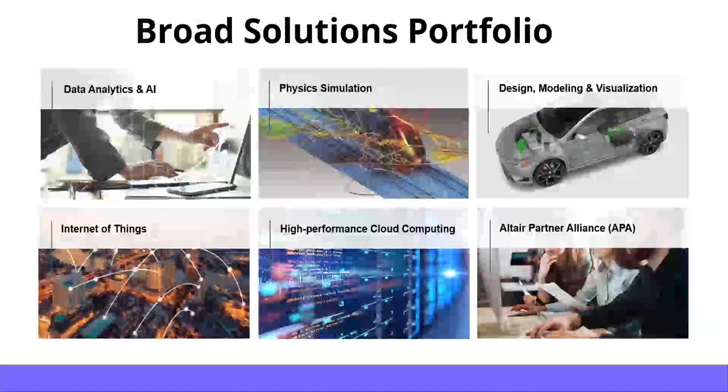The other thing, just to point out, Altair's tools have been used by various customers. And I think the really cool thing you're going to see as we work through today's webinar on implicit modeling is that the applications run the gamut from product design through aerospace and automotive, through government and defense. There's a lot of customers using DfAM and additive manufacturing, and being able to take advantage of implicit modeling is super, super useful.

Then we're actually going to spend some time within Inspire 2023, focusing in on implicit modeling. So we'll jump through the different types of lattices, specifically looking at field-driven design, and even jump into a little bit of Python scripting.

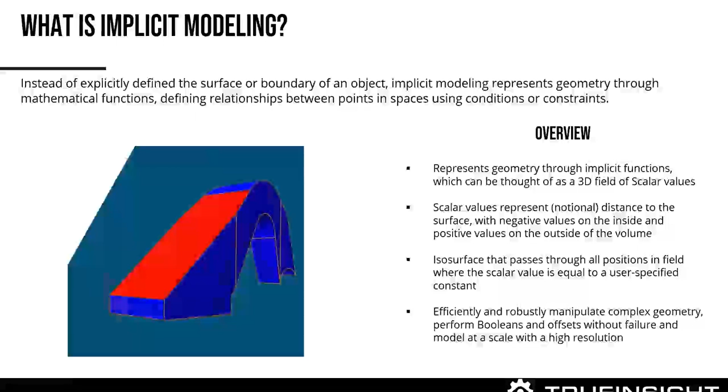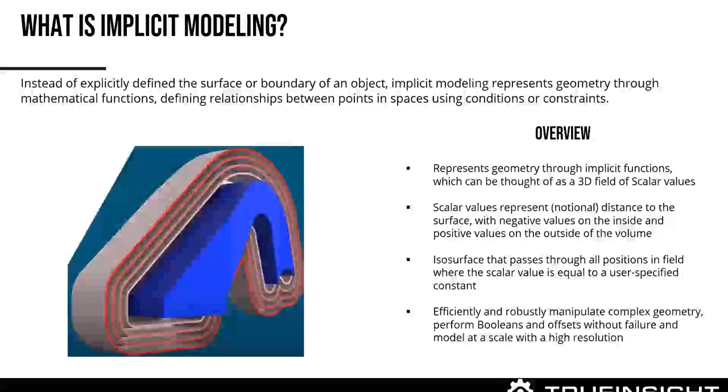So as a result of being able to model things through mathematical functions, it's much more computationally efficient than traditional explicit modeling. So it really allows you to work on complex geometry. The advantage of additive manufacturing is we can now easily manufacture lattice structures, and lattice structures are super, super handy. We see them in nature, in bones and biology, and being able to utilize that technology and model it is very important. So why do we want to use implicit modeling?

So like I said, with implicit modeling, you're modeling one single isosurface, which eliminates the need to create NURBS surfaces. A lot of you probably have done some surface stitching. I did it in one of my previous jobs. It can be very painful going through surface modeling and having to stitch things. Sometimes it works. Other times it can be very exhaustive, both computationally, but also frustrating.

And because in implicit modeling you're modeling a single isosurface, it automatically generates those interfaces, which is very nice. As a result of this, you can model really complex topologies. We'll actually take a look at some with the different types of lattices and complicated structures we can create. Trying to do this in traditional explicit modeling, like traditional CAD, can be very complicated.

So if you look at the images on the right here, it's an example of implicit versus explicit. You see those fans and a heat sink with some lattice work in it. If you're trying to model that in traditional CAD, since it's a 64 by 64 by 64 lattice, that means there's about 260,000 unit cells.

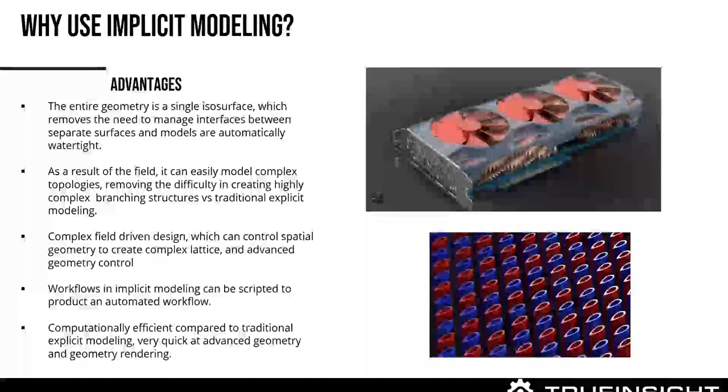The final thing about it is it's really set up for automated workflows, really easy to script if you want to. With the Inspire interface, you can do everything within the GUI, but we do enable Python scripting, so that makes it very nice. So with that being said, let's jump into this.

Okay, so here's an example of traditional lattice design in traditional CAD. So this would be explicit modeling, like I mentioned, some traditional tools out there, B-rep geometry. How you would approach a lattice is you would generate a unit cell. The process of doing that typically is creating surfaces like you see on the left-hand image right here. You generate them and you form a unit cell in the middle. From that point, you then pattern it in whatever 1, 2, or 3 dimensions.

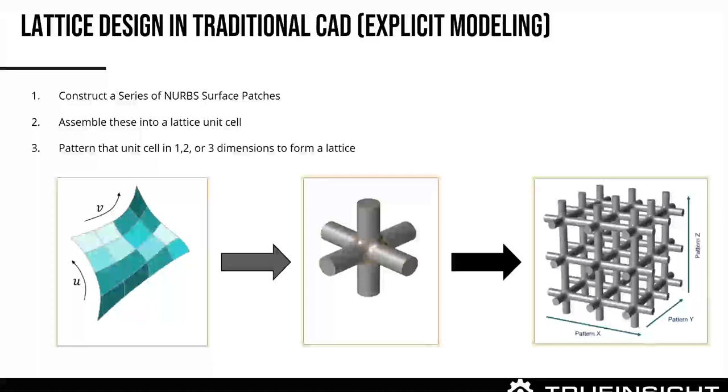This can be done in explicit CAD, but it becomes very computationally exhaustive. You start having very huge files, and it also takes a while to render or move things around within the system. Whereas in implicit modeling, you are modeling everything through a single isosurface. So again, it's able to model all those values very efficiently.

So some of the advantages of using implicit modeling. We talked about being able to model lattices efficiently. That's a huge game changer, and the time savings there. But also in traditional explicit CAD, you are limited in what you can do. Specifically, you have to pattern a unit cell, and that makes it very hard to do translational adjustments. So you see this image on the left-hand side here under translation adjustment.

This would be an application where you see that in the Y direction, the number of cells, those little holes, start to change. So you can actually adjust your lattice work in the Y, Z, or X directions. It's very challenging to do this in explicit modeling. You can do it, but it's not really efficient, and that's something you can do very quickly in implicit modeling.

The other thing would be density adjustment. Density adjustment allows you to make some things thinner and thicker. So thinking about why would you potentially utilize lattices? One would be strength to weight savings. You're reducing the whole mass you need because you can manufacture it with additive. And sometimes you may want to have a thicker lattice for something that's maybe carrying more of the load.

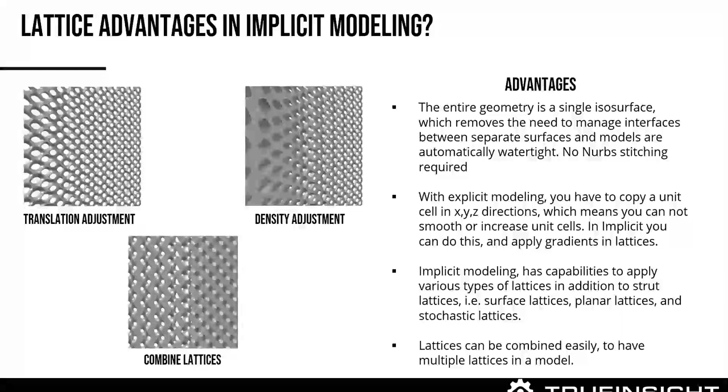The last thing that's really nice about this is you have capabilities to combine multiple different types of lattices. This gives you capabilities for, an example would be like a heat exchanger, trying to have a really nice optimized system with multiple flow paths to move through, and being able to combine lattices is something that's really, really nice within our tool.

So within our tool, the most recent release of Inspire 2023 brought in implicit modeling. Altair has a tool called Sulis, which was an implicit modeler, but most of those features have been migrated over to Inspire, and it really makes the interface very nice and efficient. So what we can do in Inspire now is we can actually create this implicit geometry. And I'm going to step us through a number of examples.

But one of the things I'll say is this is how the menu is laid out. For those of you who are familiar with Inspire, the great thing about this is it's built directly into the Inspire tool, and it has the same GUI and interface you'd expect for our traditional BREP modeling in Inspire. We can now do it for implicit modeling. So you see on the left-hand side here under the create option, you'll see a number of icons.

Starting from the left with the primitives icon, it gives you capabilities of being able to have automated tools, which would be cuboids, cylinders, and spheres. And then specifically, it allows you to automate the actual process of applying those parts. One of the nice things about the primitive tool is say you're importing a whole geometry into the environment, and maybe you want to have a small location with some lattice work. You can apply it accordingly, which is nice.

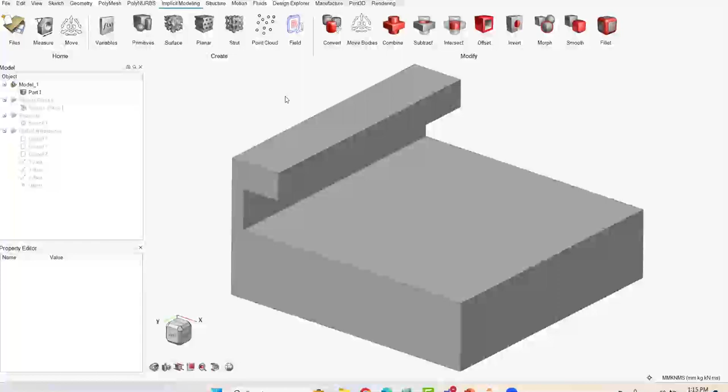But keep in mind, Inspire has always been a traditional BREP tool. So if you wanted to create geometry in Inspire and then jump to implicit modeling, you could do that as well. In this case, we're going to start from a pre-built bracket. And you'll see I actually did generate this in Inspire. That's one of the cool things about the environment. So I created it and extruded it, and now I'm going to jump to the implicit modeling menu.

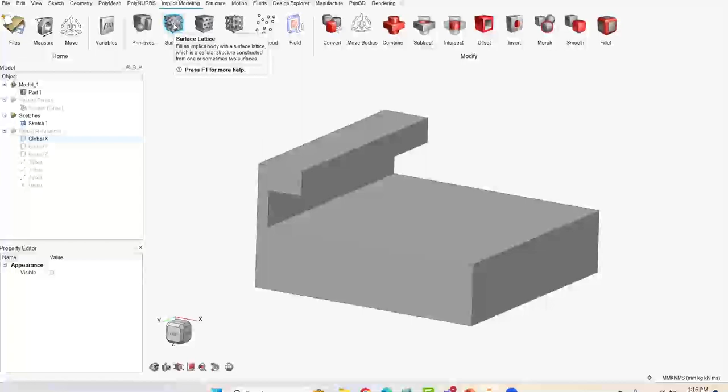So from this case, let's take a look at it. One of the first things that's fairly nice about the environment is it gives capabilities where I can click on an option. And keep in mind, I'm going to turn off the sketch. I am running a webinar right now, and this is all being done just on my GPU. So this makes it fairly easy to adjust things.

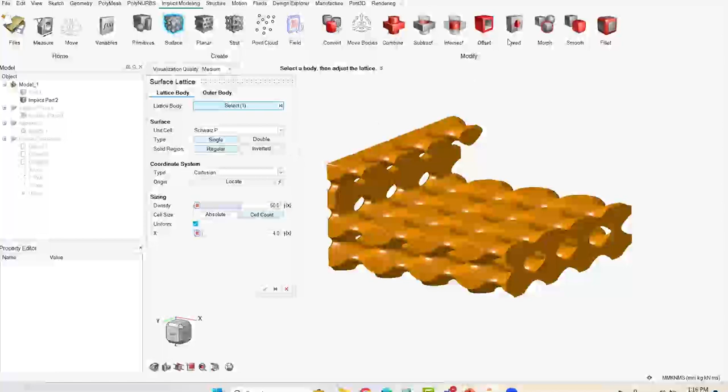Most of you who are running CAD probably have some type of certified GPU card. GPU allows you to work off your graphics card, and it really is a much more efficient way of going through this. If you want to utilize your CPU, you can, but it's optimized for GPU, which allows me to change the unit cells very, very quickly here, which is very nice. So you see a lot of different types of unit cells built into the environment. I'm going to stick with a gyroid lattice. That's the one I'll utilize.

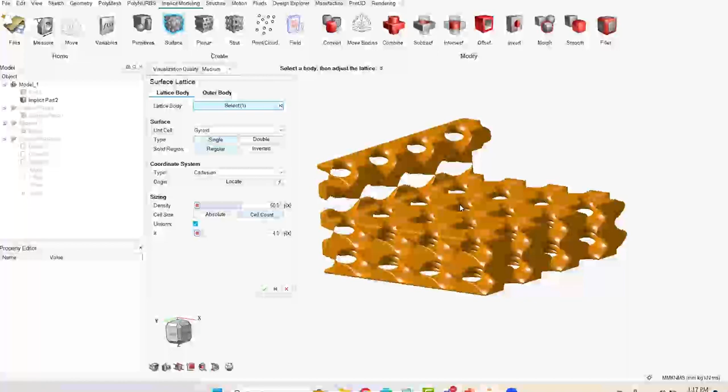Also really nice about the environment is if I hover over each of these icons, it'll tell you what each of these types mean. So this will create a single fully connected surface versus a double surface, which will give you two surfaces. And this is very efficient for heat transfer applications. Like I said, gyroid lattices, TPMS lattices, are very nice for building heat exchangers. So you could have a double surface in that regard.

So if I change it to double, you see what happens: it makes two surfaces. It does give you a little bit more geometry. Under the solid region right here, it gives you the capability of inverting it or keeping it regular. And this can be pretty advantageous maybe for a strut lattice. If you're trying to create a reverse cavity, you can do that, which is nice.

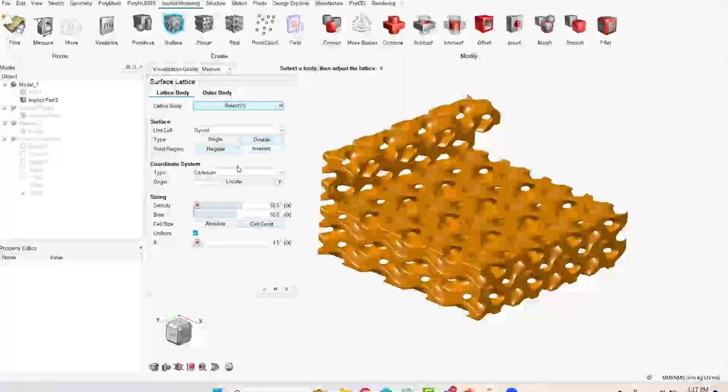Our coordinate system right here, because this is a traditional Cartesian modeled system, I can utilize it, but keep in mind, I can change my coordinate system and you'll see that it will update for the specific coordinate system I'm working in. I can also locate it if I have a local coordinate system. If I want to utilize that, I'm just going to work off of the Cartesian XYZ directions here.

So our next option under the sizing option is I can actually specify whether I want something as a value of percentage. So if I type in 20%, you'll see less dense material, more holes, more lattice flowing through the system. Accordingly, if I bump it up to 80%, you'll see much more solid material. So that's how this works.

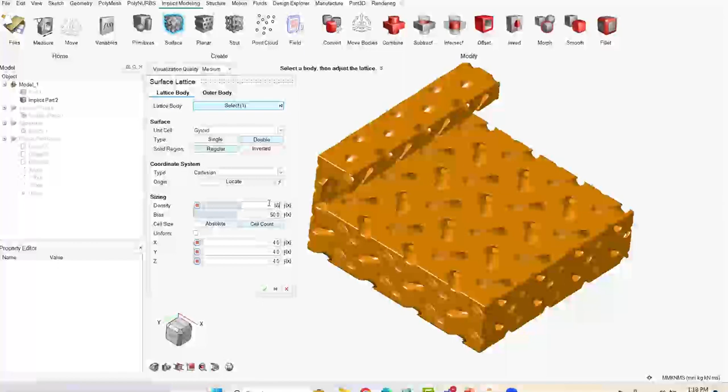You can also change it from going off a percentage to an absolute value. I'm just going to have a 50% density. That's a good place to start. And then our bias, if I adjust this, you'll see it changes how it's adjusting that lattice work as you're working from node to node. So again, if you hover over it, it's changing how the volumes are going to be adjusted, much like a bias in say FEM applications.

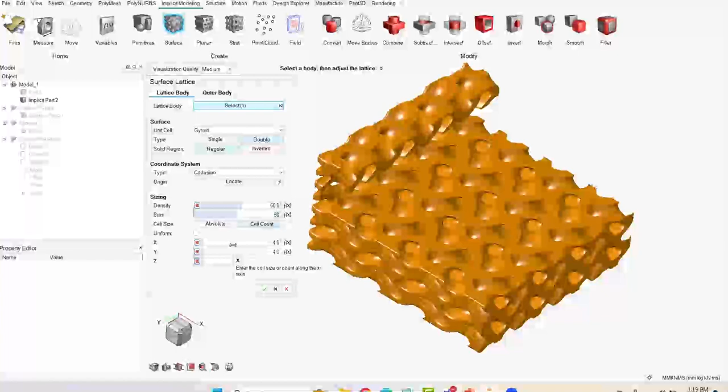So if we look at the directions right here, specifically, I can specify a uniform density. So if I go to the uniform density option right here and adjust this, you see how it's adjusting the density right here. So I'm going to stick with a value of 6; this is a multiplier.

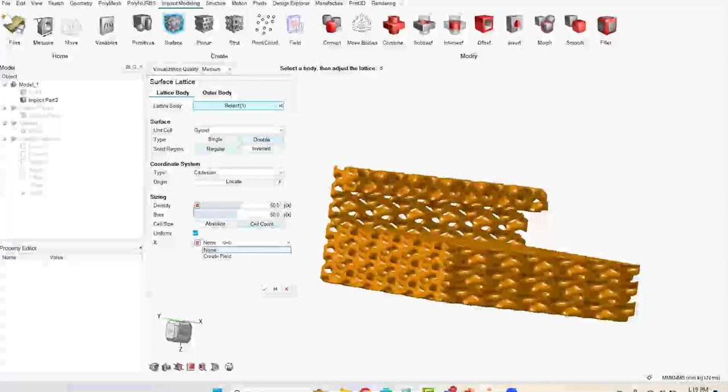And keep in mind, I can also change these to be point cloud or field driven. I'm going to show an example of that in a moment. So if you're wondering, can I actually control this? I can do that. I'm not going to do that for this first example, but this would be our first application here. So if I hit the green check mark, you'll see that I have a lattice that's generated right here. And the cool thing is I can adjust the visualization quality if I want. I'm going to keep it on the medium quality and then hit the green check mark.

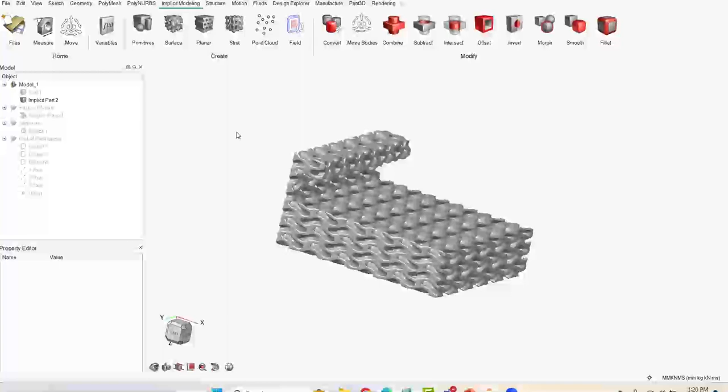So one of the cool things about our tools specifically is we have capabilities to adjust the geometry or go back. There's actually a pretty cool thing within Inspire called the construction history. And if I go back to the construction history, I can actually adjust this lattice. So I'm gonna do a couple of things here. One of the useful things for a lot of parts is we want to have an interior lattice but maintain the outer surfaces. So we're creating a shell. I'm going to do that in this application right here.

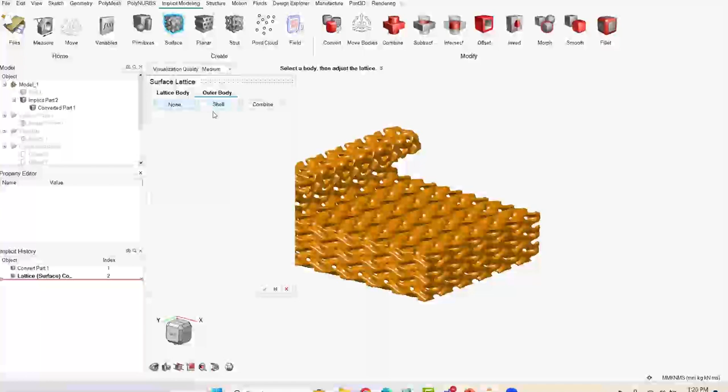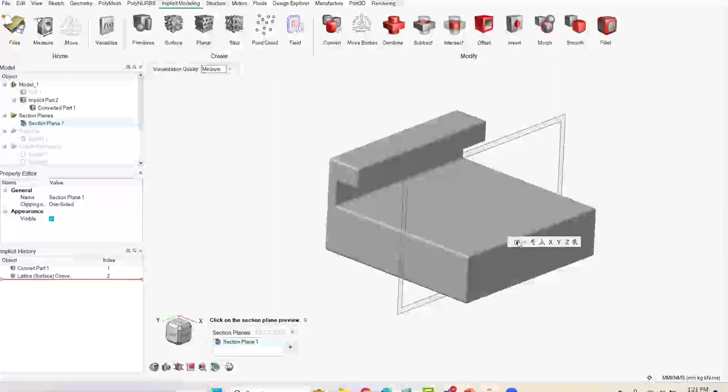I'm going to go to the outer body. I'm going to specify a shell. And you'll see right here, I'm specifying a shell, and I can specify how thick I want it to be. In this case, I'm going to apply a fillet transition and use a 1 millimeter transition. Then I can create a cross section here if I want, grab that part and hit the green check mark, and I can see my cross section, which is very nice. So you see that fillet that's being applied, which allows for a smooth transition.

So that's really a cool feature. You can specifically have a shelled or interior lattice, and it's set up to be fairly easy to do that right within the implicit modeling menu.

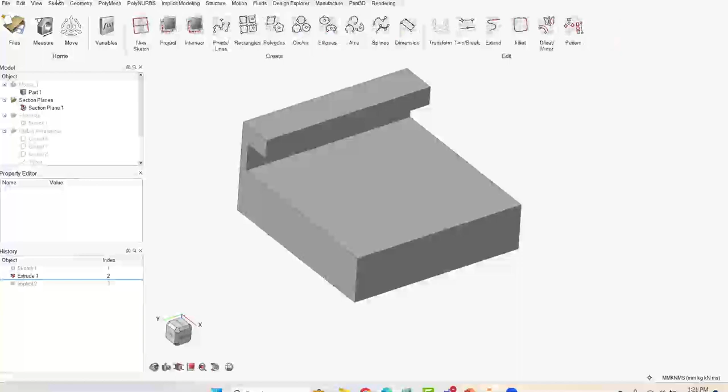One of the other really cool things about having a construction history, so if I hit the green check mark here, is I can roll things back. So what I mean by that, if you're familiar with traditional rollback bars in traditional CAD modeling, if I want to go back and adjust the B-rep body here, let's just create a cut extrusion on the top.

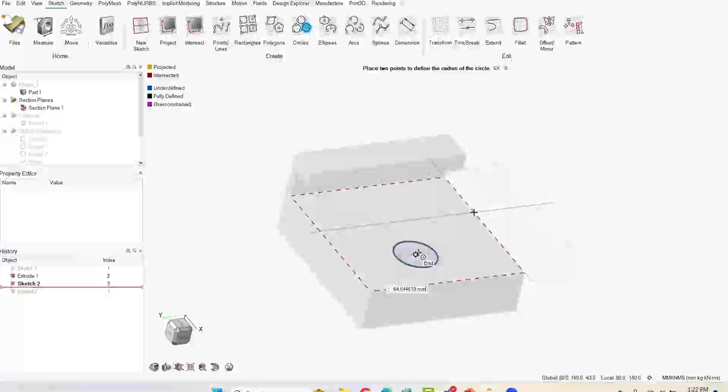So let's do that. I'm just going to create a small, easy cut extrusion. Again, if you're unfamiliar with Inspire, we can utilize parametric relations. I'm not going to do that in this case. I'm just going to create a quick circle so we can visualize it. But I can dimension everything however I want. It functions like a traditional explicit modeler.

So if I go to geometry here, and then I go to cut extrude. So remember, these are the B-rep geometry commands. These were in Inspire prior to the 2023 release. If I hit subtract and click on that body and go through and hit the green check mark, you'll see I've created a hole through the component.

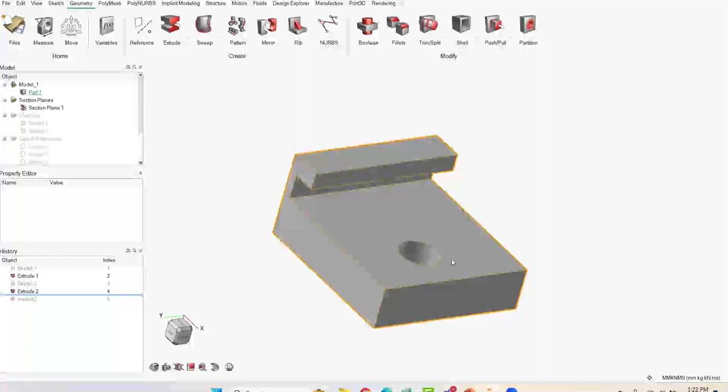And then if I come up here, and if I roll things back, you'll see that obviously there's no lattice going through here, which is pretty nice. I can turn off the section plane, and it gives me that capability if I want to adjust things. So that's one of the cool things about it. I can use that rollback bar and make adjustments accordingly.

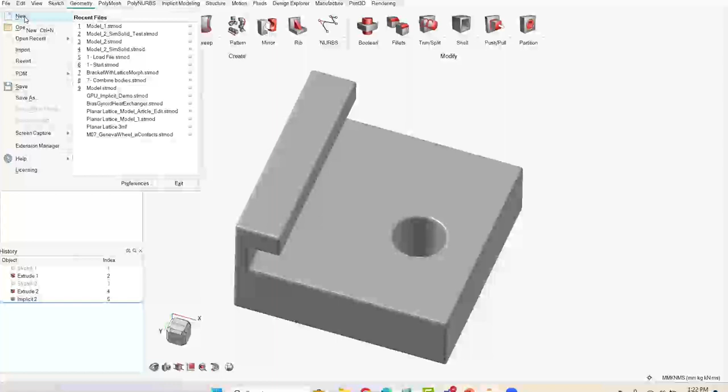Let me keep working through a couple different options here in the implicit modeling option. So I showed the ability you could create geometry, you can import geometry, but let's get in the weeds a little bit here with some of the implicit modeling tools. So first thing I didn't show you is the primitive option right here.

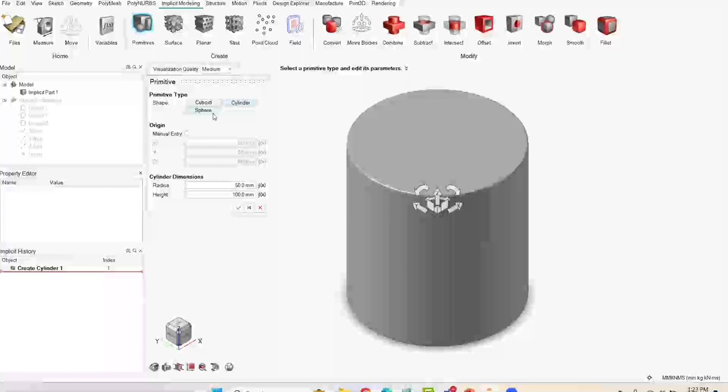So if I create a primitive, these are what I was talking about. It gives you capabilities to automate a lot of basic shapes, but these can be very useful when you're going through a geometry and trying to make manipulations. Keep in mind, you'll probably still be importing your geometry or maybe creating your B-rep geometry in Inspire and then creating lattice, but this is a nice way of being able to create something very quickly.

So I'm going to create a cuboid, and I'm going to create another cuboid. So I'm going to have two implicit cuboids here. And the reason why I'm going to do that is I'm actually going to combine these, to show you some of the modification commands built into Inspire.

So first thing I'll do is I'm going to use a different mesh here. Instead of using a surface mesh, which we just showed, let's do a planar mesh. And you'll see with a planar mesh, everything can be rendered very quickly because we're taking advantage of GPU. And you see I can change these on the fly, which is pretty cool. I'm going to use a hexagon mesh, use the default sizes right here, and then hit the green check mark.

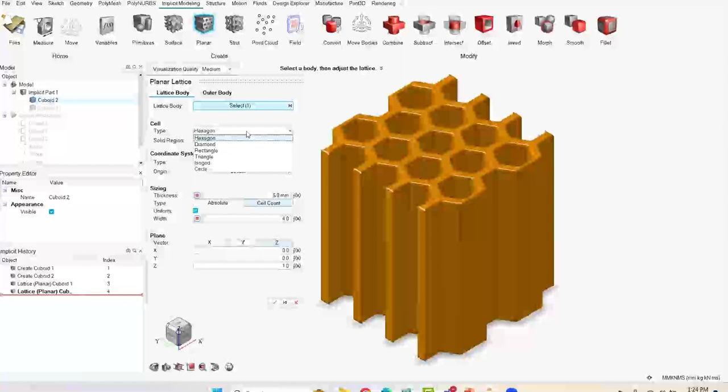And then I'm going to create another mesh, but it's going to be a little bit different. Instead of a hexagon mesh, I'm going to use an isogrid mesh. And then I'm going to adjust this density here. Let's go to maybe 6. 5 actually looks pretty good. I'm gonna have 5 and hit the green check mark. And then if I turn on both of these cuboids, you can see a cool shape, just illustrating what you can do.

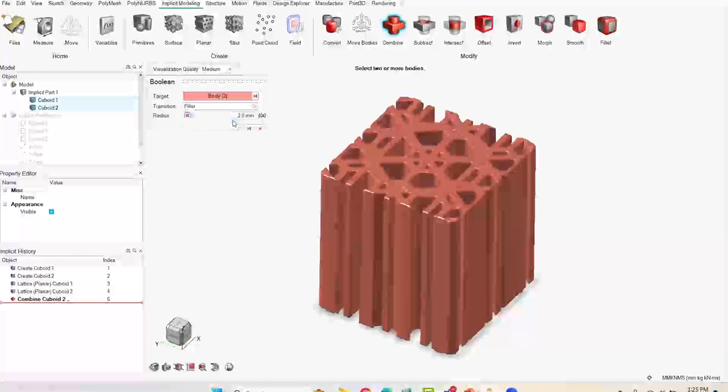So if I go up to the combine option right here, I can click on both of these bodies, and you see I can create a custom shape. I can also apply a transition where I apply a fillet if I want. I'm going to keep a sharp transition; that looks a little bit nicer. And if I hit the green check mark, you see right here, I have this cool shape that I've generated. But the cool thing about this, remember, I can use this rollback bar and I'll see I have these two shapes again.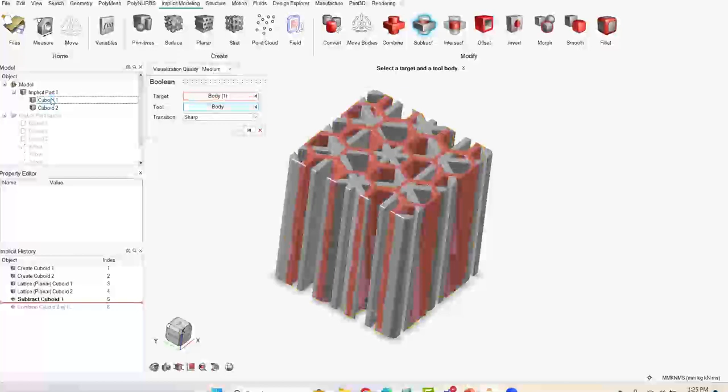So maybe I want to do a subtraction from one body and then click on the other body. And it gives you a preview of what that subtraction is going to be. So again, it functions very similarly if you've used the Boolean command in traditional CAD modeling. It's set up to be very familiar, even though we're working with implicit bodies, which is very nice.

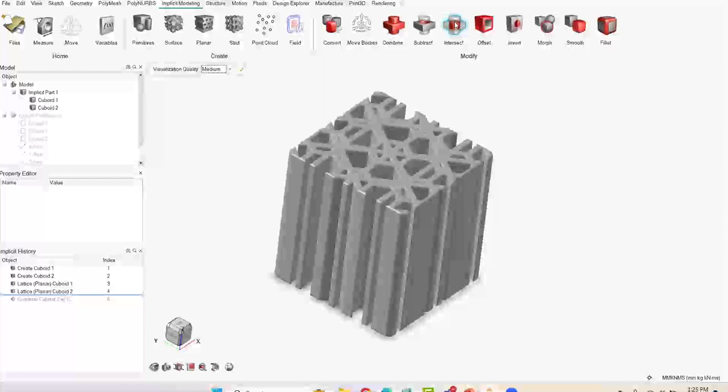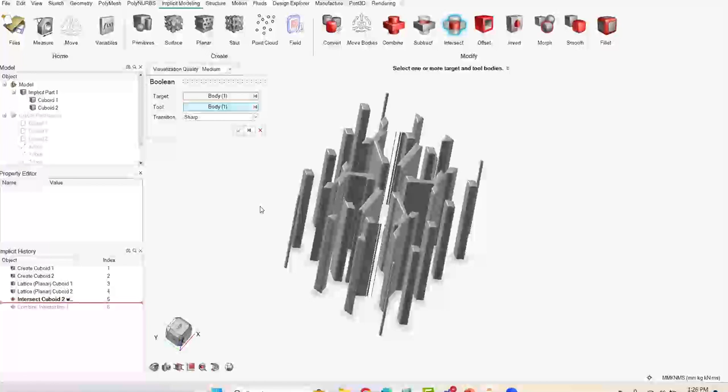Let's try another command here. Let's do an intersect command, and then grab the other body. I'm going to go with this guy there, and then this guy. And you see an intersection, again, functioning much like a Boolean command. So it gives you some nice capabilities of being able to make manipulations on the lattice front.

Great. So one of the other things I want to show is I'm going to close out of this for a second here, and then I'm going to generate another example. So we went through the Boolean applications right here. So maybe I want to go through the morphing options. So if I click on the primitive option right here, I'm going to create a cuboid, and I'm also going to create a sphere.

So a lot of times with implicit modeling, it's not always for lattice work. It can be for other things that might be traditionally difficult to do in explicit modeling. One application of that might be loft creation in traditional CAD. Those who've done surface modeling know it can be somewhat time consuming to have appropriate lofts. And because everything's modeled as a single ISO surface, it makes it a lot easier to manipulate things with field-driven data. So I'm going to introduce this idea of a field concept in this case.

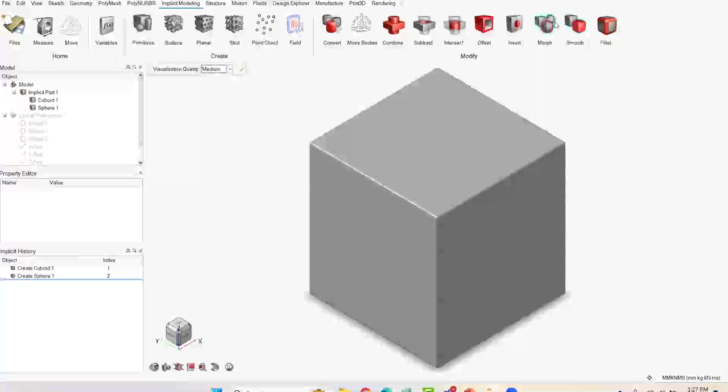So if I click on the morph option, I'm going to grab the cuboid and the sphere. The way the morph option works, it's going to morph between these two bodies we have. So if I adjust this slider all the way to 0, it's going to be body A, and then I think 100, it's going to be body B. So you'll see the variation between the sphere and the cuboid. Now, if I go to 50%, you see a mix right here, which is useful. And it's morphing between these two objects within the context of the body.

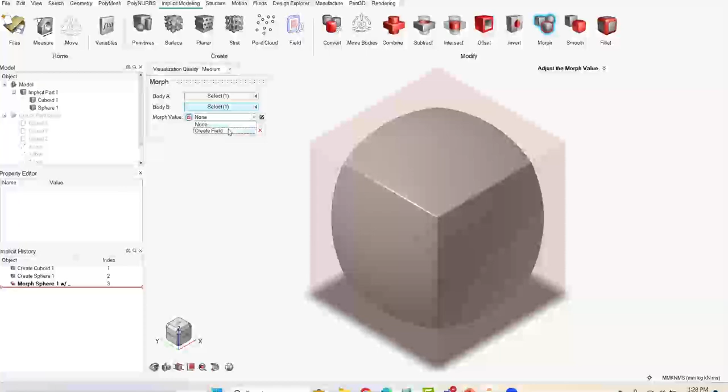But one of the cool things about it is I can actually create a field, meaning I'm going to adjust how it's going to morph between a set range, whether it's a plane or a point. So let's actually do that now. I'm going to click on the field option right under the morph value here and select create field. So you'll see with the field option right here, it reverts to using a plane. I could specify whatever plane I want. I'm going to use the Z plane.

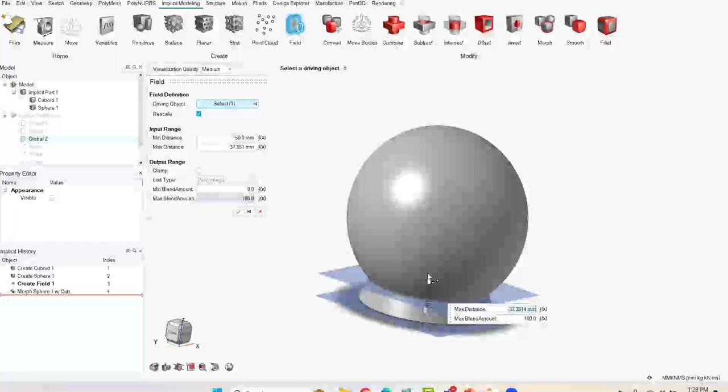But the cool thing about it is you're going to see that it starts to adjust the morphing as it moves between the bottom plane right here at -50 millimeters all the way to the top. So it's creating a really nice, efficient surface loft. And this is implicit modeling. It's not necessarily creating a lattice. If you wanted to create a lattice, maybe we'll do that. You could. You can also adjust the blend value.

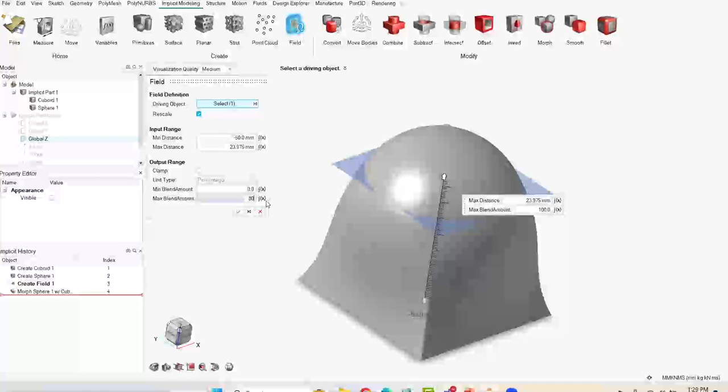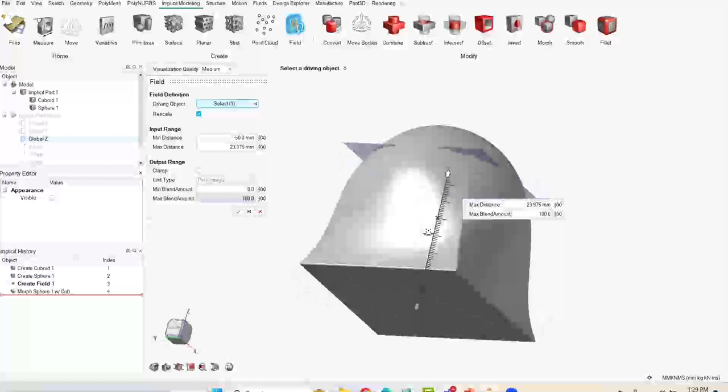So if I don't want to go from 0 to 100%, maybe I want to go to 80%, or let's make it something a little bit more drastic. Let's go 50%. You'll see it's going to be moving much more towards body B, so it's not having as much spherical blending. I'm going to stick with 100%. So I've created this nice shape very quickly without having to create any boundary curves or things you'd have to do in traditional CAD modeling, explicit modeling.

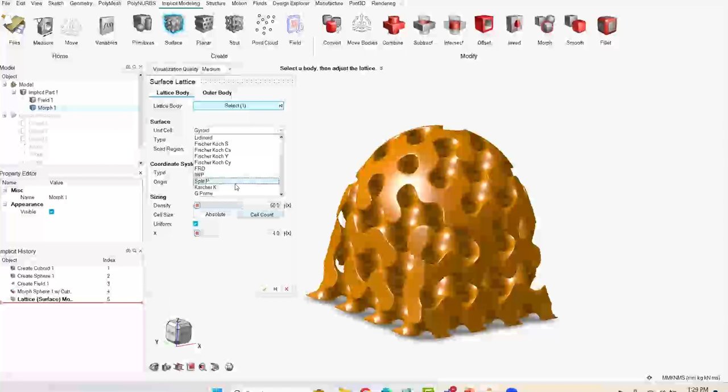So if I hit the green check mark, you'll see I create this entity right here. And if I wanted to actually generate a lattice, I could click on this, and off of that cool morph shape, I can create a pretty nice lattice. I can go through and adjust things accordingly, which is very, very nice.

So from this application, I could save this out, but I want to jump into another application. So one of the cool things about Inspire is it's been a very prominent tool in additive, specifically structural analysis and optimization, and then also just regular structural analysis. So a lot of the key reasons why you might be doing lattice design is you want to maintain your strength and integrity while minimizing mass.

Well, the implicit modeling features take advantage of being able to utilize SimSolid. So with that being said, let's take a look at an example of how we can create a lattice and then actually run SimSolid to visualize the results. So I'm going to close out of this file right here. I'm going to File New, and I'm going to go to File Open, and I'm going to go to this model here, and we're going to actually generate a lattice.

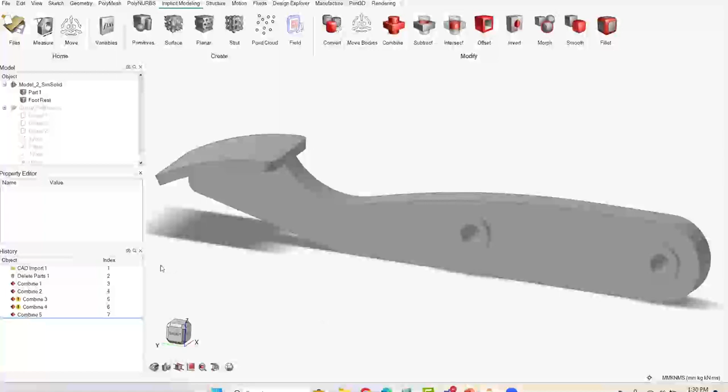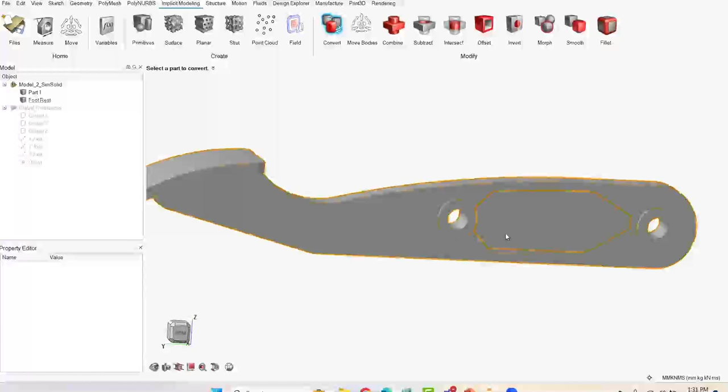So this is just a gas pedal, and it's something that could be conducive to additive manufacturing of metal, metal 3D printing, and we're going to have a lot of solid components, but we're going to have some that are going to be lattice work right here, this entity right here. So what I'll actually do is I'm going to create a lattice for this part. So I'm going to click on Convert. I'm going to turn this into an implicit body.

And from there, if I want to, I can generate my lattice. So in this case, I think I'm going to use a planar lattice. So I'm going to click on planar lattice. I click on the entity, and then let's use a diamond pattern. And let's type in our thickness value.

So the other thing to keep in mind, we can easily change our units here because we're in the Inspire framework. If I wanted to change to IPS, I could do that. I'm going to work in SI for now, but I'll show you how we can change our units on the fly. So let me just do that real quick. Change my units, see the inches right there if I want to. So keep that in mind. That's something that's nice, being able to change your units on the fly.

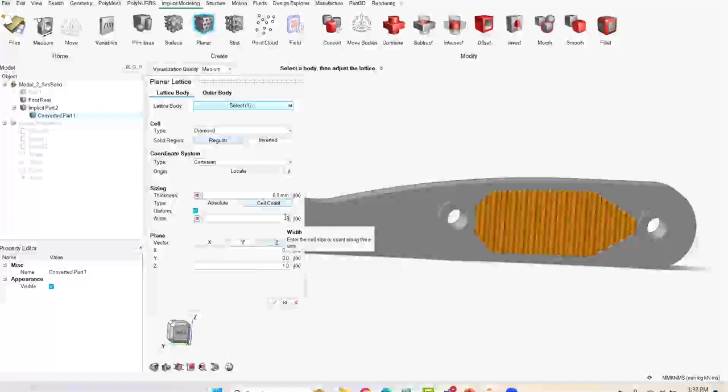I'm going to use a size of 0.5 millimeters. And in this case, I'm going to specify a width of about 3. And I'm going to go in the X direction. All right, so I'm creating a lattice work right here, a nice diamond lattice work. But one of the cool things about this is I can also trim these entities so it has a nice union on the B-rep body.

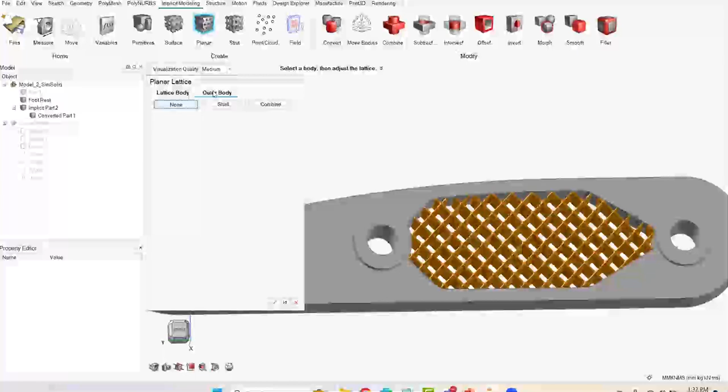So the B-rep body is the rest of the pedal, and I have my implicit body right here, which is the lattice work. So if I actually go to the outer body option right here, click on shell, and then click on the trimming body right here and grab the outer body, it's actually going to trim it up nice. I think the thickness is too thick. I'm going to go like 0.5 millimeter.

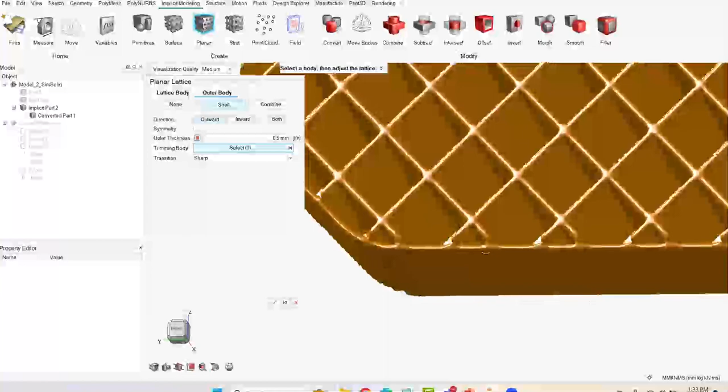And the other cool thing about it is I can create a transition. So it's kind of sharp right now. I might want to apply some fillets here. So I'm going to change the transition to be a nice fillet. You can see it starts to smooth things out. Maybe I'll adjust it, but I'm going to use a 1 millimeter fillet.

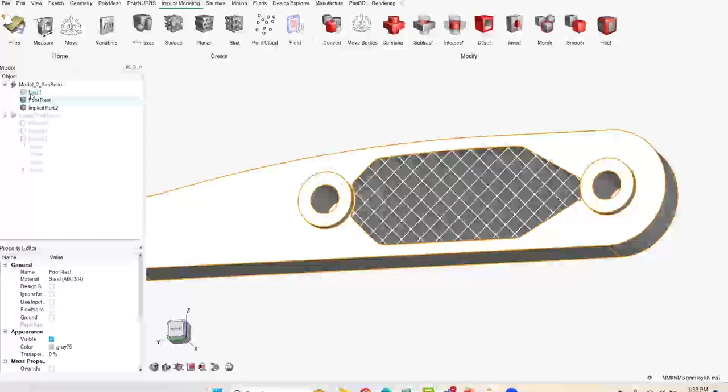All right. So from that point here, I can see my bodies. I don't need the original B-rep representation here. I can probably delete that. So I can right click on the B-rep of that interior geometry and delete it. And now one of the cool things I can do is I've generated this lattice here, but maybe I want to run an actual structural analysis.

So technically we have a B-rep body and we have an implicit body. The cool thing about SimSolid as a tool, it's a meshless based tool. So we can convert everything to a triangle mesh, what you would do if you're exporting to a 3MF or an STL format. So if I actually go to the geometry menu right here, I can actually do a Boolean between a B-rep body and an implicit body.

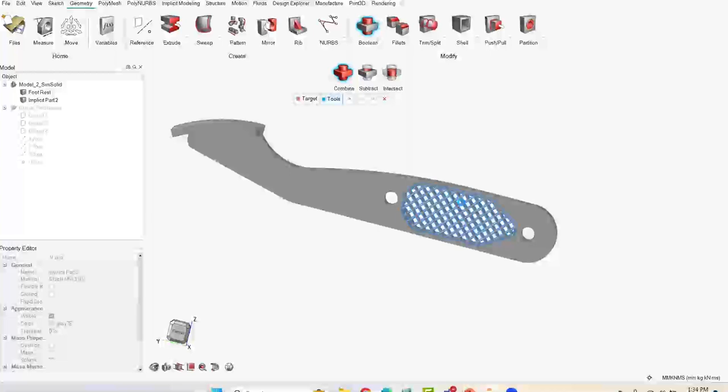What you'll see after it goes through this is it's going to create the triangles, and it'll allow me to set up my structural analysis fairly quickly. So it'll take a little less than a minute. What you'll see when we look at this is it's creating all the triangles. So if I zoom in, you'll see all the triangles of that mesh facet data it's generating.

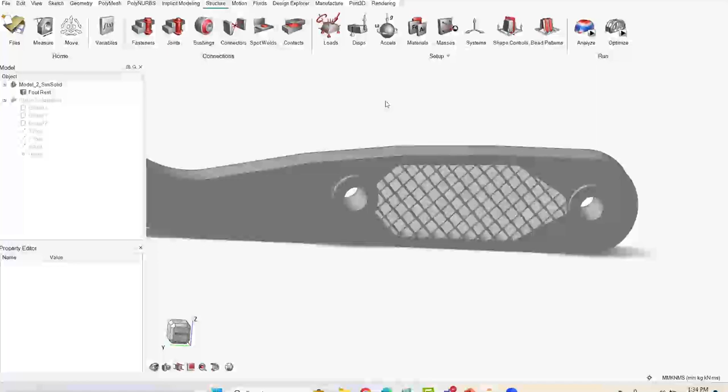So this would be ready if I wanted to export to 3MF or STL for 3D printing. But what I actually want to do is run a structural analysis here. It's really nice if you haven't used Inspire for some of our structural analysis tools. It's set up to be a very useful, easy tool. So let's think about it.

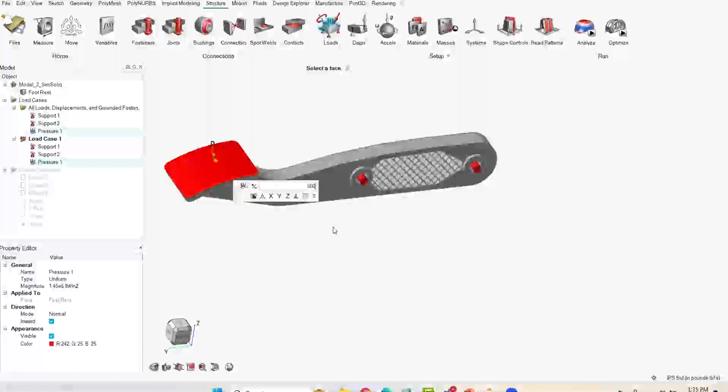These holes are going to be what's locking it in place. So I'm going to apply some translational supports on these interior faces. That face right there, and also this face right here. Okay, great. I can accept that command, and I'm also going to apply a force on the pedal. So let's change these units. Like I said, I was going to change the units on the fly. Let's be in IPS. Let's do a 500-pound force value and hit the green check mark.

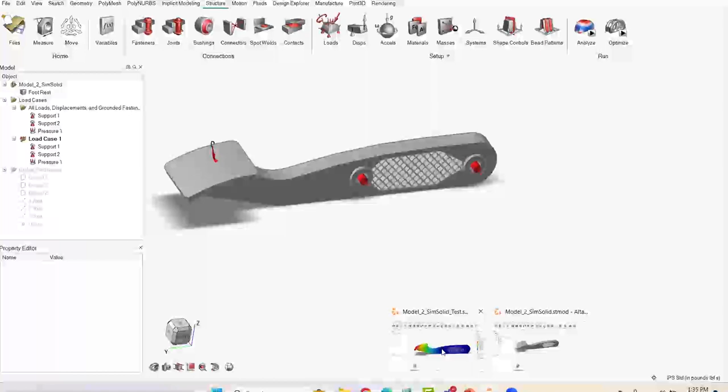Then if I wanted to change my materials, I could. I'm just going to use a steel material, something I'd probably be printing this out of, and I could run my analysis. So I could hit play and run it. It runs fairly quick, probably in less than 2 minutes, but for the sake of the webinar I'm not going to have it run. I already have one queued up and ready to go. So I can play and animate my results.

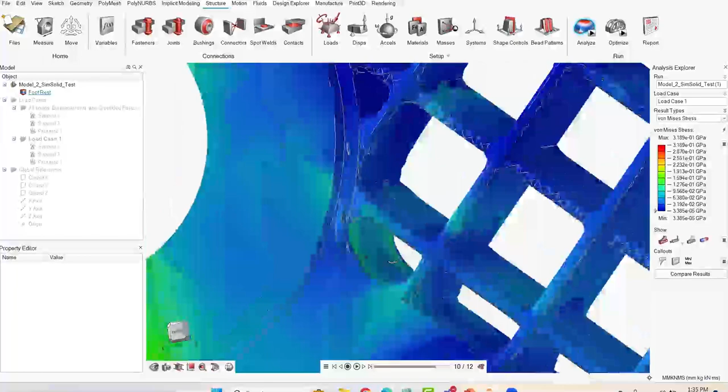So I see, all right, that makes sense. I can adjust and scale things if I want to visualize them. But let's take a look at the stress values. This is the really cool thing about it. If I change to my von Mises stress values right here, I can zoom in and see where some areas of the lattice are taking a little bit of the stress. So it is helping with this main hole, which is being locked in place, which, as you can imagine, is probably going to be a weak point.

And this might be an application where, oh, I'm seeing a somewhat high stress here. Let me change again to IPS for our units here. It's not that high, but if I do a call out, I can hover and see what that value is. So about 7,000 PSI, so 7 KSI. I don't know what the steel yield is for this material, I think it's around 30 or 40.

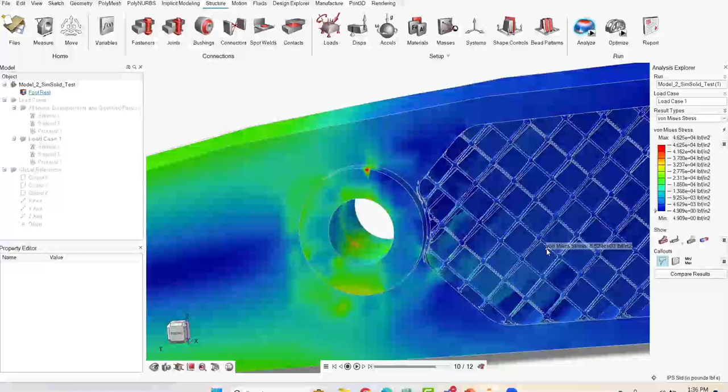So if you wanted a little bit more factor of safety, what you could potentially do is apply a thicker lattice, or maybe do a variant, a field-driven lattice, which I'm going to show an example of in a moment. But this makes it very easy for those of you who are building these lattices and getting them ready for printing to integrate with a nice, easy to utilize structural tool. That's harnessing the technology of SimSolid to handle that, which is nice.

Okay, great. Let's jump into another example here. I'm going to close this out. I think I'm going to use that same pedal, but I'm going to show an application where maybe I want to vary the mesh density. Like you saw in that structural analysis, maybe I want some parts that are a little bit thicker and other areas that are a little bit thinner. So I'm going to have a combination lattice.

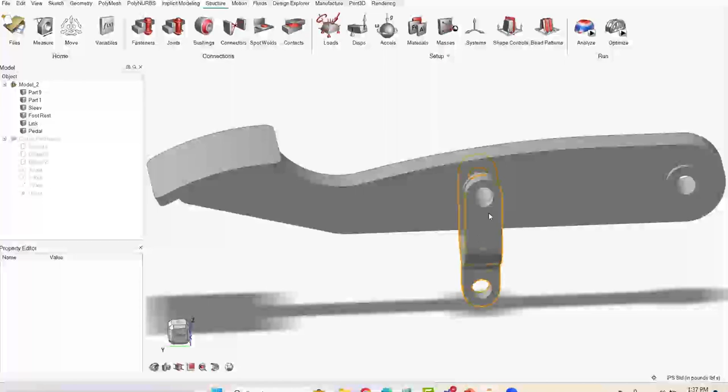So let me open up that file. This looks good. All right. You see I have the attachment bars right here. I didn't have that on the structural analysis. I could have if I wanted, but I think I suppressed them. But I'm going to create a variant implicit modeled lattice right here.

So I'm going to have two different types of lattice, and they're going to actually adjust with respect to the direction you're applying. So I'm going to actually hit convert. I'm going to click on this body right here. I'm going to make it an implicit body, changing it from a BREP body to an implicit body.

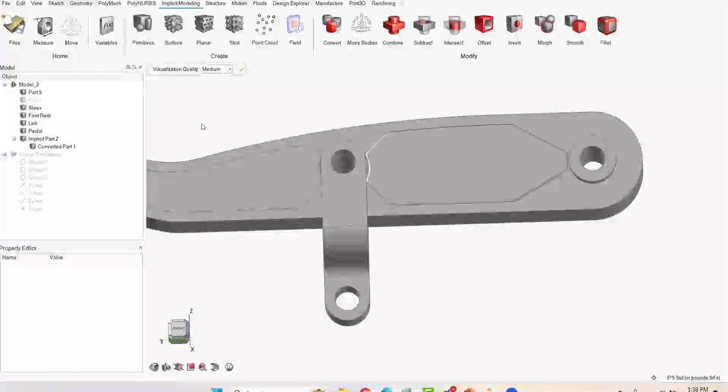And you'll see when you do that in the Inspire model tree right here, it will always tell you, hey, this is an implicit part. You'll also see the context menu of the visualization quality for the implicit body showing up. And I'm actually going to copy these because I want to have two different lattices. So I'm going to right-click, hit copy, then right-click, hit paste.

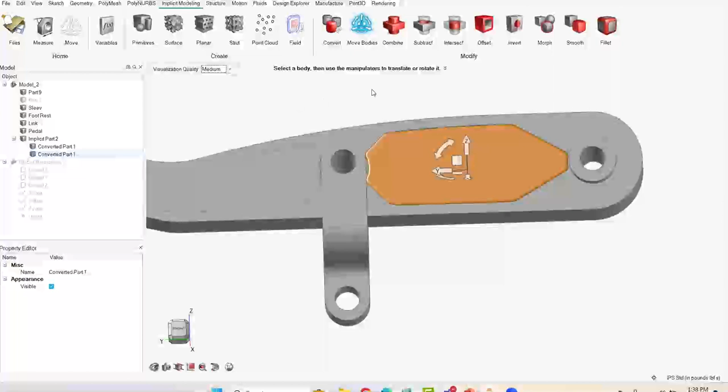All right, so I see I have two actual parts in this model right here. And I'm actually going to generate two different lattices because I want to adjust how that lattice density is going to change. Okay, for clarity's sake, I'm just going to show the implicit parts here. And I'm going to go through and generate these lattices one by one.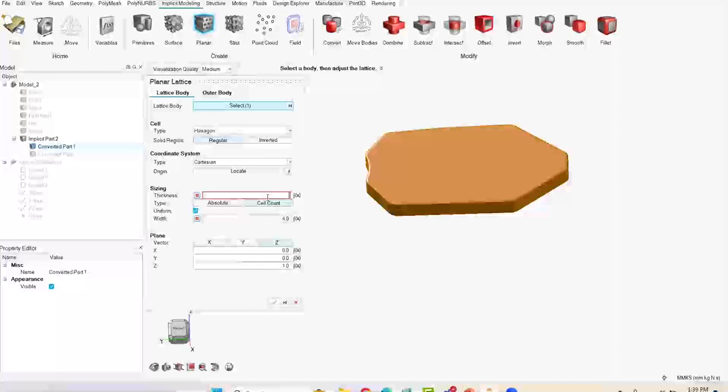So the first lattice, I'm going to do a planar lattice. I'm going to do a hexagon lattice this time instead of a diamond lattice. And I'm going to specify a value here. I'm going to change back my units because my notes are in millimeters. Change my units here, and I'm going to go to 0.5 millimeters. And I'm going to go to a width of 5. Does that look right? Yep.

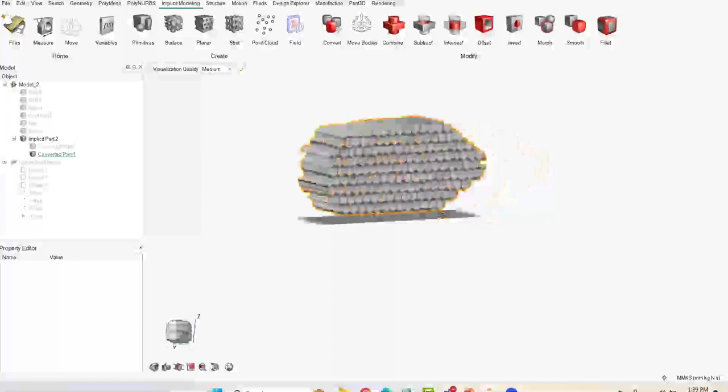And I'm going to go to the X direction. Okay, so it's fairly similar, except instead of using a diamond, I just wanted to use a hexagon here. Okay, great. And so we'll see we have this implicit body of that lattice I generated. Now, I want to go to my other implicit body, because again, I want to adjust the density, and I'm going to do that now.

So I'm going to create a strut lattice here. So I'm actually going to click on the strut lattice option, and I'm going to use, I think, a body-centered cubic lattice here, and I'm going to specify a size of 2 millimeters. I think that's based on the size of this part. Yeah, that's pretty good. And a width of 5. So you can see it's much thicker. I'm adding a little bit of thicker density right here on the strut lattice.

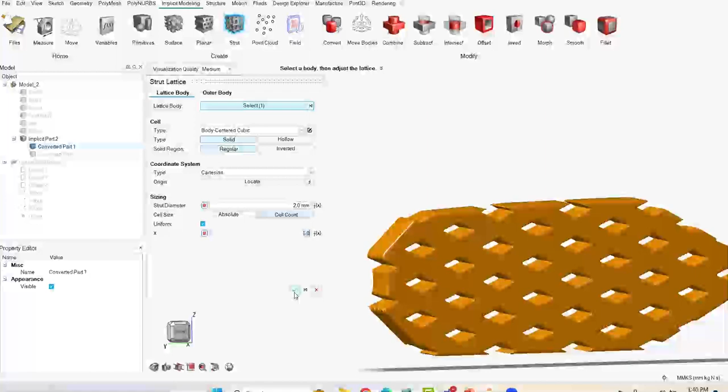This is what I talked about, where you might want to have a more dense lattice in certain areas. And I'm actually going to combine these parts. But instead of using a combine command, I'm going to use that morph command, which I showed you earlier, which is also pretty cool. I can morph two implicit bodies. All right, so I'm going to hit the green check mark. I'll see right here I have the 2 bodies.

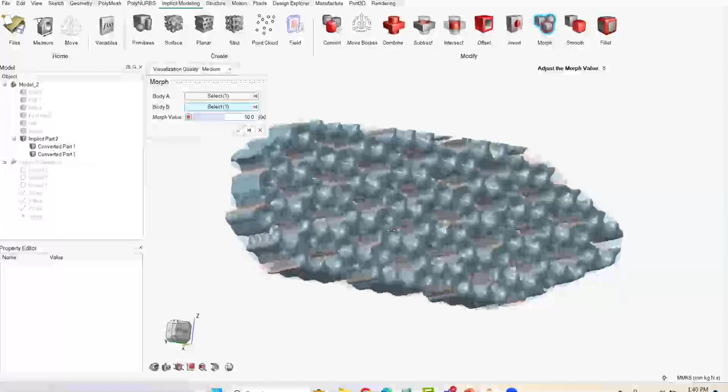If I turn them on, okay, it's not quite what I really want because it's just interfering bodies. I actually want to have a transition from one lattice to the other. So I click on morph and grab both of these implicit bodies, and then I can create a field data, because I want it to morph with respect to a specific direction. In this case, I want it to move through thickness, which is, I think, the X plane. Yep, the X axis.

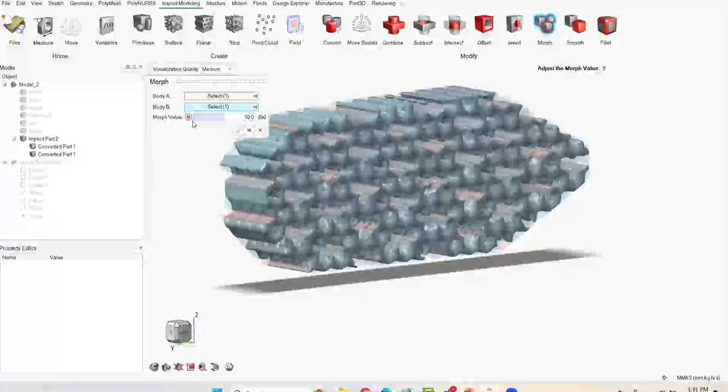So I'm actually going to create another field value. A field value, remember, is just how you're affecting density with respect to a constraint. In this case, it's going to be driven by a plane. So let's go and create a field. And you see I can change a lot of directions, but instead of the Z direction, I want to use the X direction here.

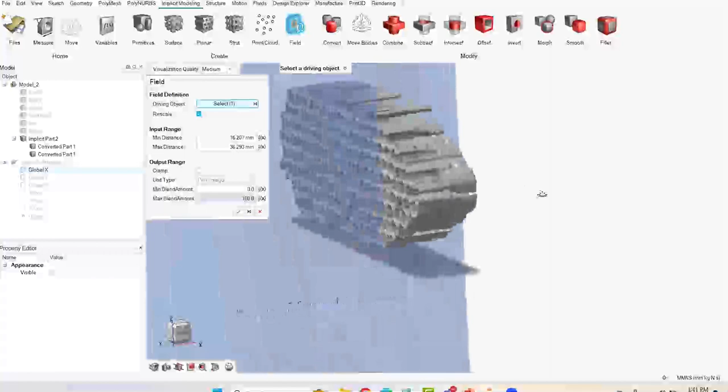And that's perfect. So I see I have the strut from the one side and I'm varying it out to the other lattice. So it's a little bit thicker on the one side and blending between the two. So if I hit the green check mark, you'll see that I've generated this thicker side lattice. Let me just show the whole part. And I just want to hide that one BREP body where I generated the implicit body.

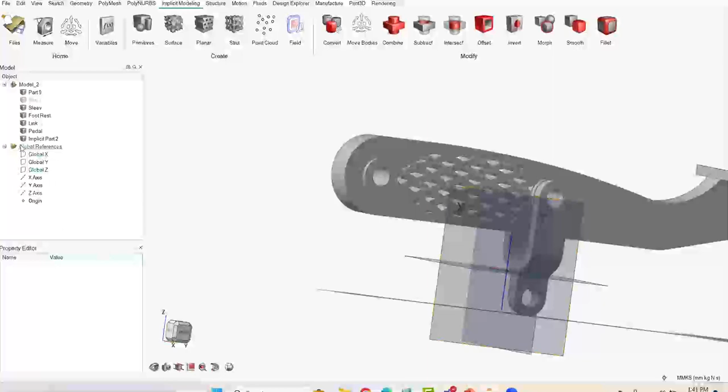This is a quick way of being able to really visualize how you can adjust density of material, which is really cool.

I mean, that's just a quick application of it, but it shows you how quickly you can combine and adjust lattices with field-driven data. So the other thing that's fairly nice about Inspire is there's a lot of control and creation options within the given GUI of the surface, the planar, and the strut. And like I mentioned, in the next release, stochastic latticing.

But if you actually wanted to create your own custom implicit body, you could do that, because remember, implicit modeling is based around an ISO surface, and it's really set up to be very useful or easy to automate certain commands. Everything within Inspire has always, up to this point, allowed us to update the Python API. The same thing can be said for implicit modeling.

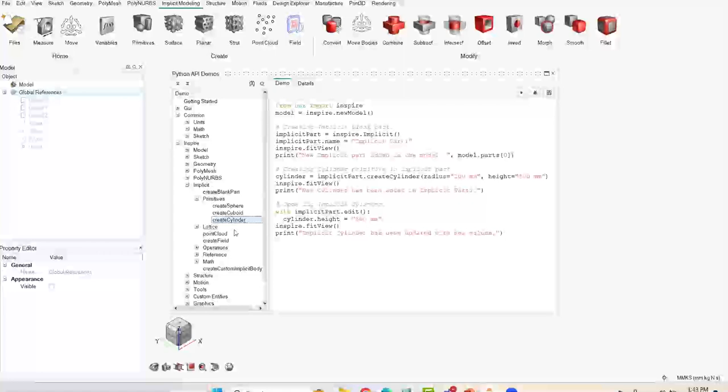So you'll see right under the actual tutorials option, this isn't a Python scripting class, but you can see on the implicit option, it gives you all the different commands and the language on the different lines within Python that you need to be aware of. It gives you those capabilities of spheres, cuboids, etc., surface lattice, the different options you need to have.

So let me just run a couple of Python scripts so you can visualize it. So if I go under my view menu and hit Python window, I just need to bring in my actual Python script right here. So I'm going to do that. I have a couple I'll run real quick. So let's do that. All right. So let's run this first script. I'm just going to bring up the actual script so you can see it real quick.

All right, so you see this first script right here. I can do a copy and paste if I want, bring it right into the Python command line and then hit enter. And you'll see it created a heart-shaped lattice, which is pretty cool. And you can see all the commands going through that. It's telling you the different bodies, which is nice.

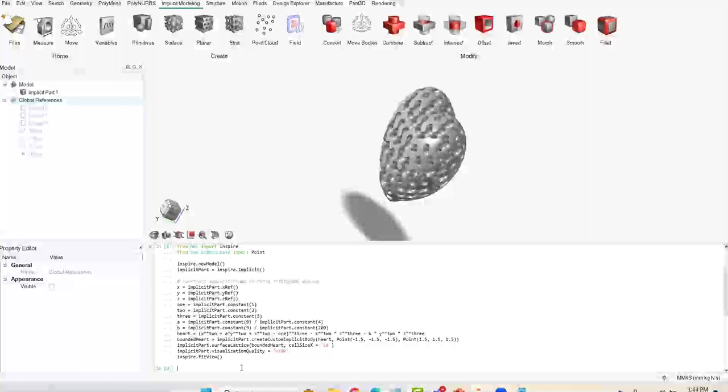The other thing that's pretty cool, like we mentioned, is implicit modeling is very useful, not just for lattice work, but for applications that might be more labor intensive in traditional BREP modeling. One thing I can think about would be modeling gears. Specifically, if you have a lot of gears in a system, like helical gears or coil gears, it can be somewhat, not necessarily labor intensive, but graphically exhaustive if you have like 20 different gears in a system. And you can just write a real quick script in Python and create a gear.

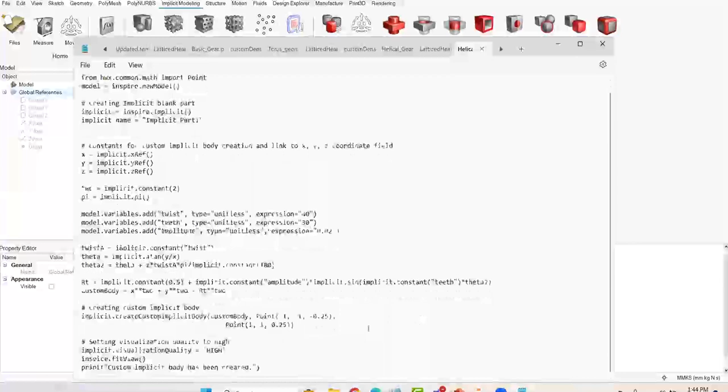So let's do that. I have another one here, just a helical gear. So let me just open it up. You'll see right here, it's creating an implicit body of the gear. I'm going to paste it in my Python window, hit enter, and you see it creates a perfect gear. And it's very easy now. If I wanted to apply a lattice, I could. On my actual gear, I can change the coordinate system now to be cylindrical and see you have a cylindrical lattice. So there's some cool things you can do in the Python scripting. Definitely the tip of the iceberg here, but I wanted to bring it up.

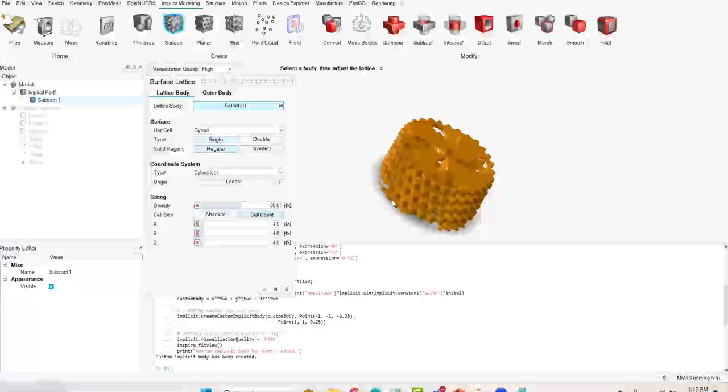Okay. The final thing I'll say, as far as being able to export, if you wanted to export out, you can very easily do that. You can see that 3MF format, as well as if you wanted to go to STL or an OBJ format, you could do that as well.

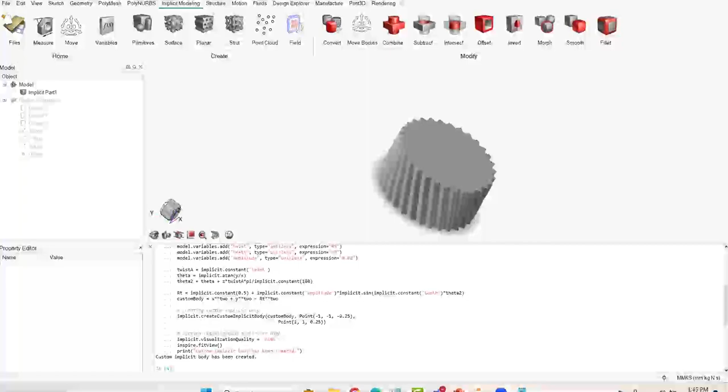So let me jump back to my PowerPoint here. Oops, let me reverse this. I'm going to open it up to questions right now.